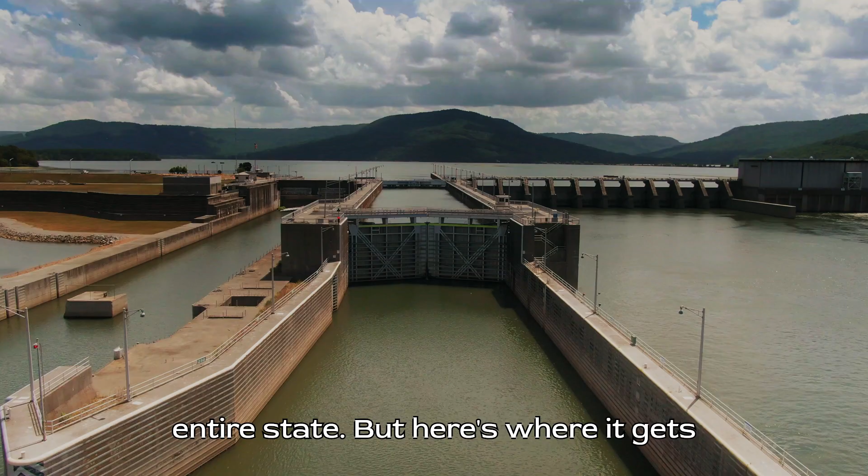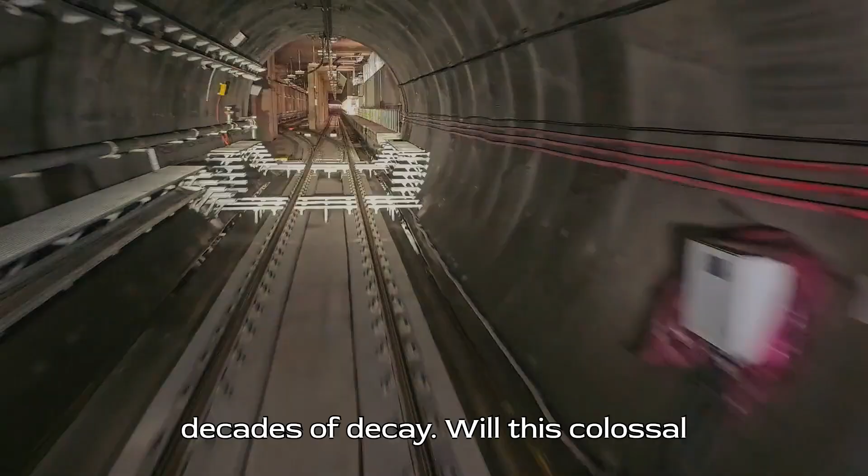But here's where it gets wild. A $20 billion plan is in motion, promising to rewrite California's fate. They're not just digging a tunnel, they're challenging nature itself, defying earthquakes, droughts, and decades of decay. Will this colossal gamble make California the blueprint for water resilience, or will it sink under the weight of its ambition? Stick around, because this story is as explosive as it gets.

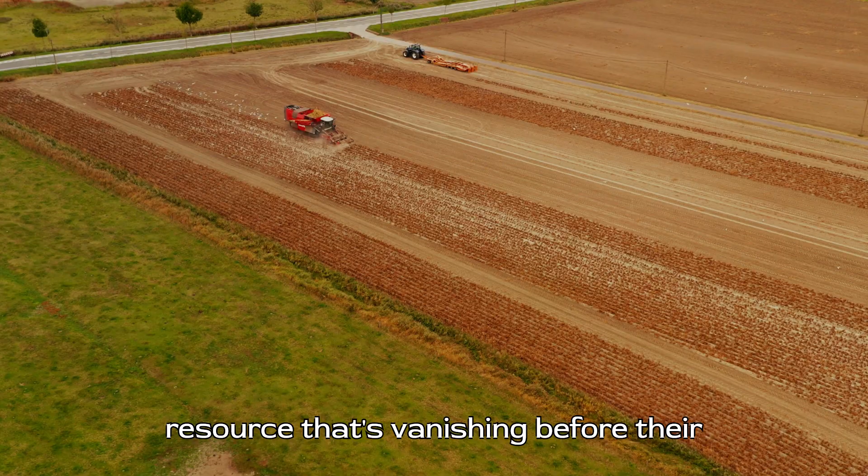California's water crisis isn't just a problem, it's a ticking time bomb. Picture this: millions of people, sprawling cities, and endless agricultural fields, all desperate for a resource that's vanishing before their eyes. Climate change is the relentless villain, turning up the heat and extending droughts like never before.

Enter the Delta Conveyance Project, a $20 billion gamble to save the state's future by re-engineering how water flows. Bold? Absolutely. Necessary? You bet your life on it.

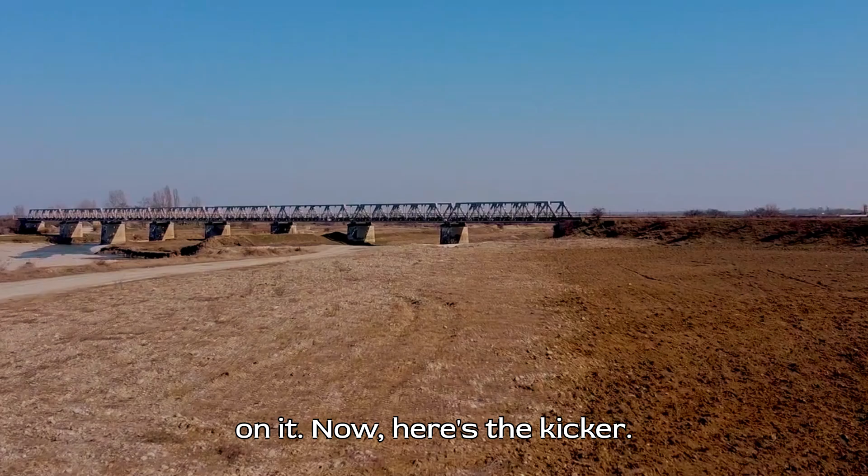Now, here's the kicker. California's water isn't where it's needed most. Northern California, rich in rivers and reservoirs, hoards 75% of the supply, while the South, home to thirsty cities like Los Angeles, struggles to keep up. Transporting water through the state's aqueduct system is already a Herculean effort, and it's cracking under the strain. Add seismic risk into the mix, and you've got a potential disaster waiting to strike. One earthquake could leave millions high and dry, literally.

Let's rewind a bit. Decades ago, California built an aqueduct system that was hailed as an engineering marvel. But here's the catch: it wasn't built for today's challenges. Exploding populations, relentless droughts, and seismic risks weren't part of the blueprint. The cracks in this aging system are no longer metaphorical. They're real, and they're growing.

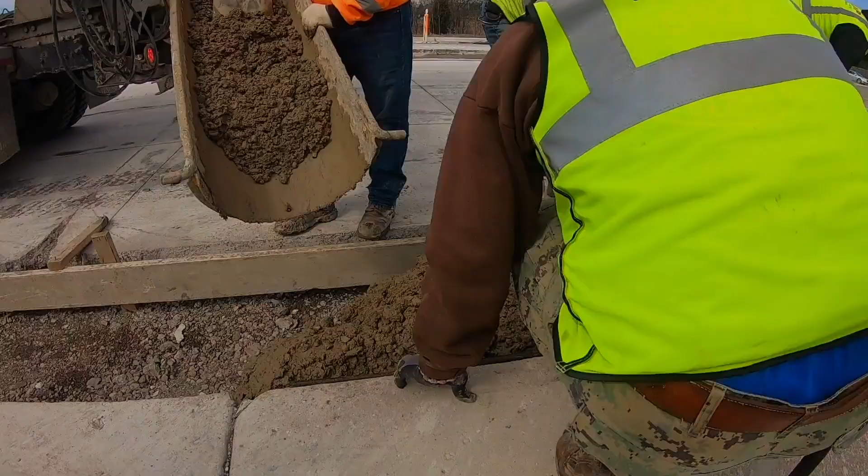The Delta Conveyance Project aims to plug these gaps with a revolutionary tunnel under the Delta, promising resilience against nature's wrath. But not everyone's cheering. Critics are sounding alarms about environmental concerns, from disrupted ecosystems to saltwater intrusion. Can California really balance urgent water needs with the delicate dance of preserving nature? The stakes are sky high, and the clock is ticking.

So what's next? To understand the scale of this challenge, we need to unravel the state's geographic imbalance, a problem that's as old as California itself.

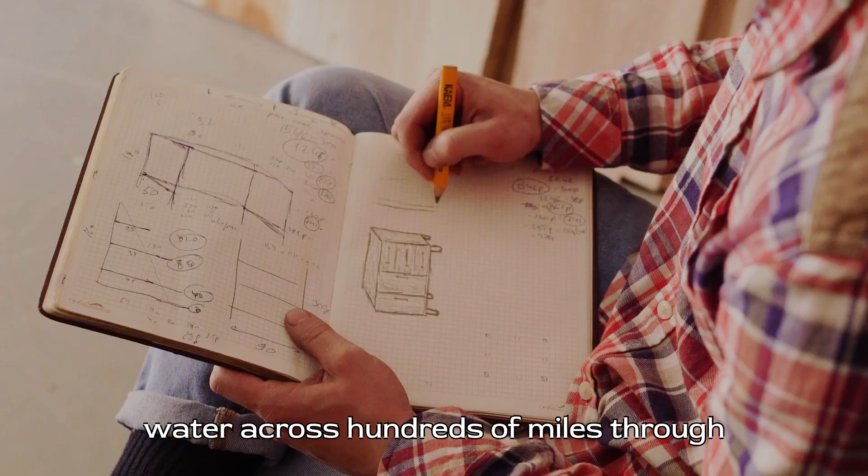Let's dive in. Imagine a state where water flows like a paradox, abundant in the north, yet desperately needed in the south. California faces this conundrum daily, with 75% of its water tucked away in northern reservoirs while the population and agriculture thrive in the south. It's a logistical dilemma on an epic scale, requiring Herculean efforts to transport water across hundreds of miles through aging aqueducts. Every drop feels like it's traveling on borrowed time.

This imbalance isn't just inconvenient, it's a disaster waiting to unfold. The aqueduct system, though impressive, wasn't built to handle today's challenges of population booms and climate change. One tremor, one prolonged drought, and the system could buckle, leaving millions stranded. It's a high-stakes balancing act, with Southern California precariously perched on the edge of a water crisis.

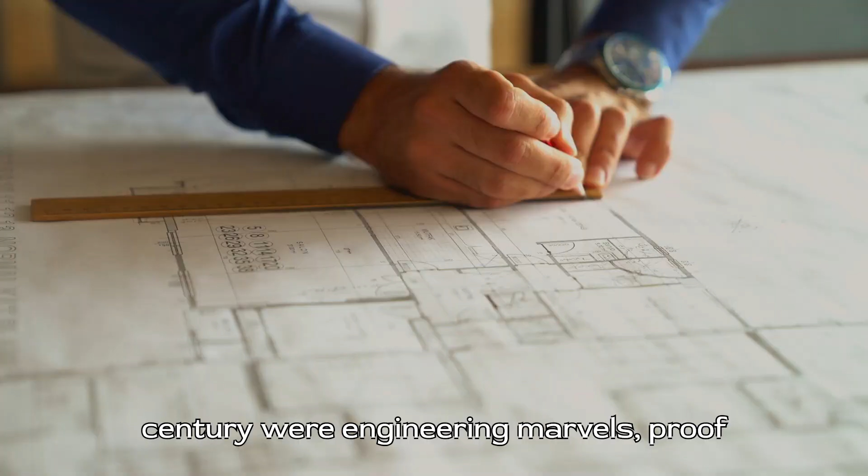But here's the twist. California has faced impossibilities before. The aqueduct systems of the 20th century were engineering marvels, proof of humanity's ability to conquer the impossible. Yet the Delta Conveyance Project promises something even more daring, a lifeline beneath the Delta, a solution to bridge this water divide and shield the state from seismic catastrophe. It's a gamble, but one California can't afford not to take.

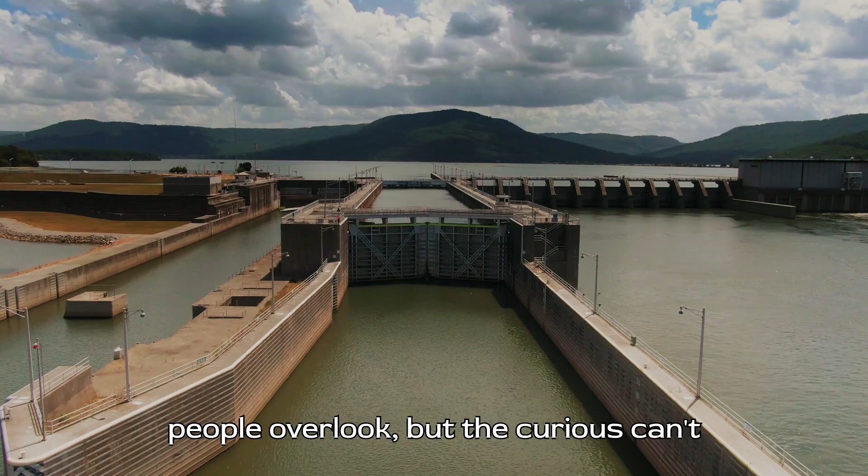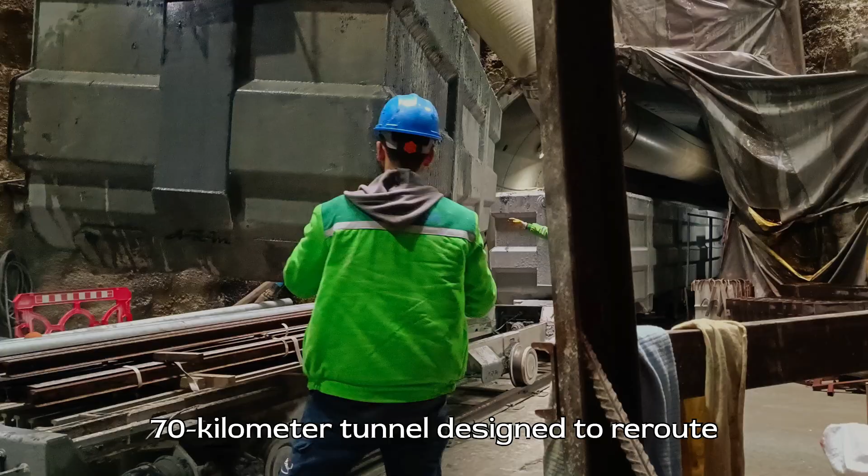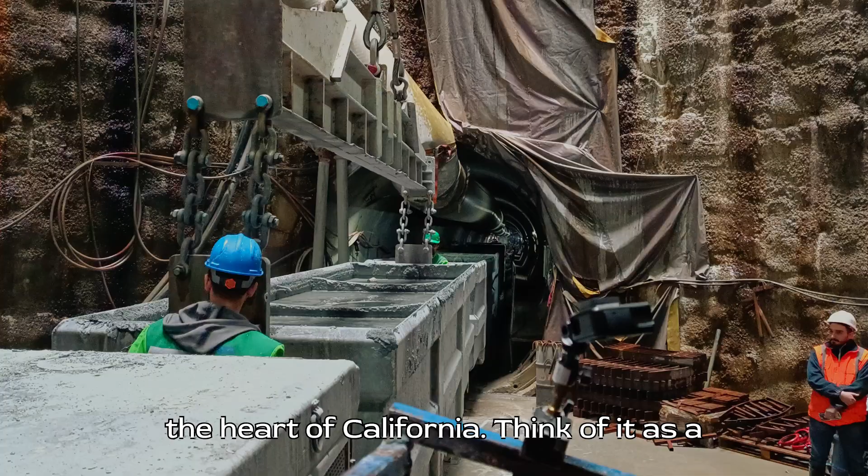California's audacious $20 billion Delta Conveyance Project is nothing short of groundbreaking. At its core is a 70-kilometer tunnel designed to reroute water under the Delta, safeguarding the state's supply from seismic risks and climate-induced disruptions. This project isn't just an upgrade, it's a complete reimagination of how water moves through the heart of California. Think of it as a lifeline threading through an intricate web of challenges. The tunnel promises to revolutionize water distribution, reducing reliance on outdated systems vulnerable to earthquakes and saltwater intrusion.

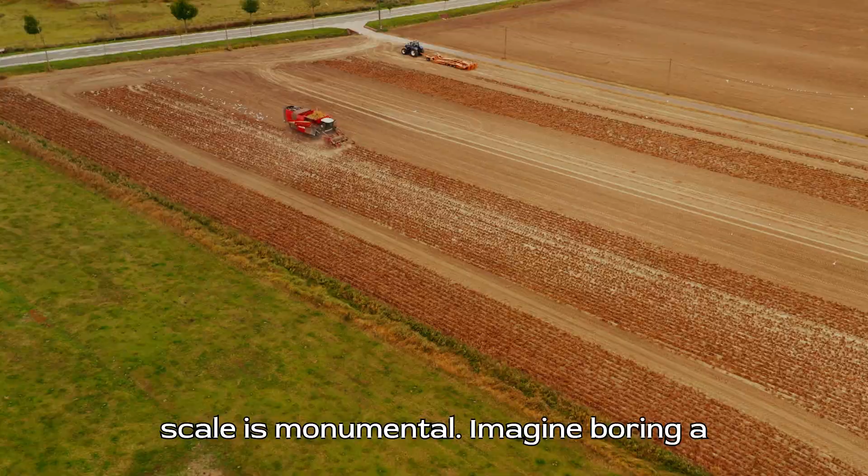It's engineered to endure extremes, ensuring a steady flow even when natural disasters strike. But the scale is monumental. Imagine boring a tunnel under one of the most ecologically sensitive areas in the world. It's a blend of cutting-edge technology and bold ambition.

Critics, however, argue that such a massive project comes with enormous risks. From potential ecological harm to the sheer cost, the Delta Conveyance Project has sparked heated debates. But for supporters, it's not just about mitigating disaster, it's about securing California's future. Without action, the state's current infrastructure could crumble under mounting pressures, leaving millions vulnerable.

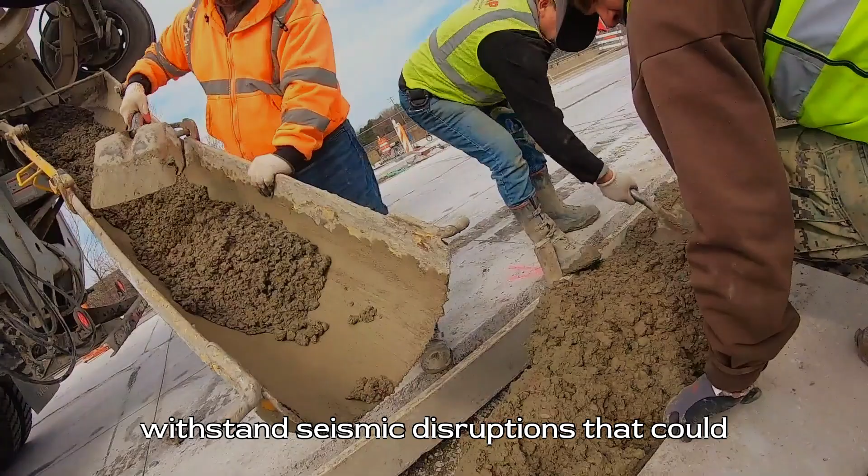The tunnel itself is a marvel, built to withstand seismic disruptions that could otherwise cripple the state's water supply.

Strategically placed maintenance shafts ensure long-term reliability, allowing for ongoing repairs without halting operations. The journey ends at the Bethany Reservoir, where a state-of-the-art pumping plant completes the transfer. Every element is purpose-built to secure California's water future.

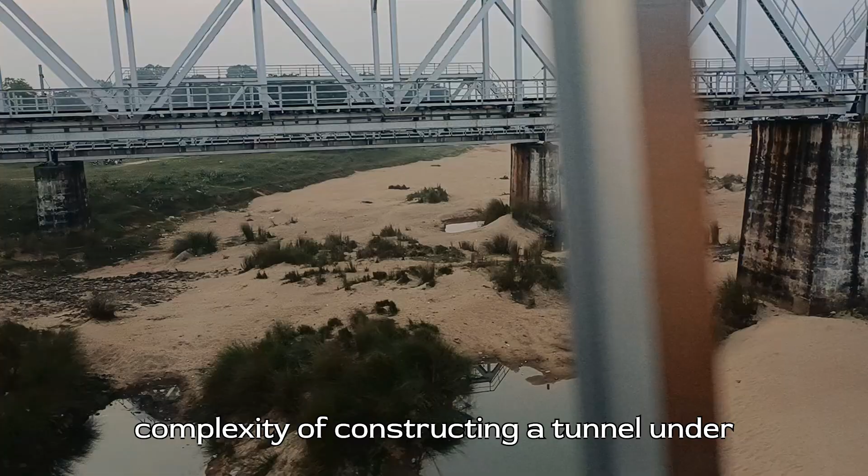Yet even the most robust systems have their challenges. The sheer complexity of constructing a tunnel under the fragile Delta ecosystem raises significant environmental concerns. Engineers face the daunting task of balancing progress with preservation, ensuring that this bold vision doesn't come at the cost of the Delta's biodiversity. It's a tightrope walk between innovation and responsibility. But the stakes are too high to ignore.

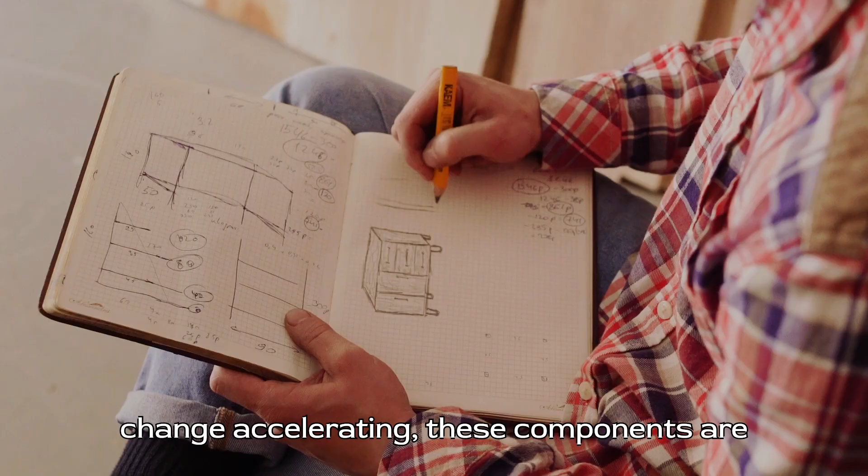With seismic risks looming and climate change accelerating, these components are designed to be more than solutions. They're safeguards for generations to come. And as we explore the obstacles ahead, it's clear that this project must navigate not just technical hurdles, but also the voices of skeptics and environmental advocates alike.

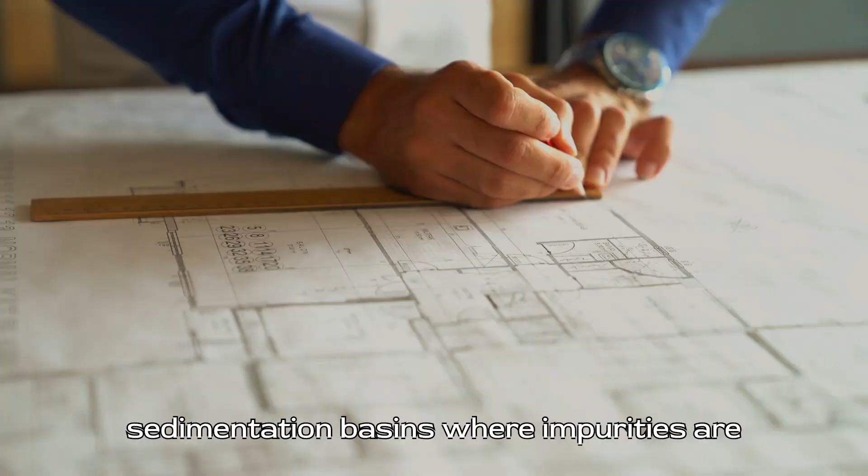The Delta Conveyance Project is more than just a tunnel. It's a meticulously engineered lifeline. At the heart of this $20 billion venture are two massive intakes along the Sacramento River, designed to collect water efficiently and sustainably. From there, water flows into sedimentation basins, where impurities are removed before embarking on its 70-kilometer journey.

Through the tunnel. This isn't just infrastructure. It's a masterpiece of modern engineering. The tunnel itself is a marvel, built to withstand seismic disruptions that could otherwise cripple the state's water supply.

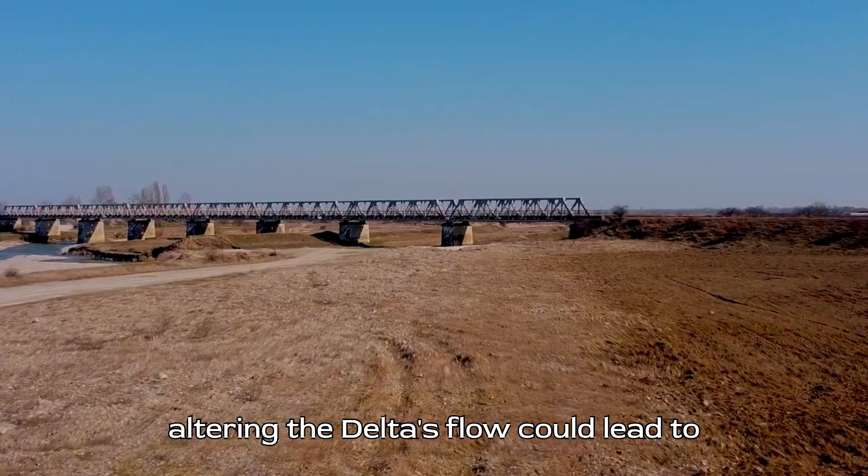The Delta Conveyance Project, while ambitious, is no stranger to controversy. Environmental advocates argue that altering the Delta's flow could lead to saltwater intrusion, disrupting fragile ecosystems and threatening species that depend on its delicate balance. The potential displacement of wildlife has sparked intense debates, making it clear that this project's ripple effects extend far beyond water distribution.

Financial concerns also loom large. A $20 billion price tag isn't just a number. It's a point of contention for taxpayers and local communities. Critics question whether the benefits truly outweigh the costs, especially when weighed against the risks of ecological harm. For many, it's a battle of priorities, securing water for human consumption versus preserving natural habitats.

Seismic risks further complicate the equation. While the project is designed to withstand earthquakes, skeptics wonder if this safeguard is foolproof. The stakes are enormous, with millions depending on this infrastructure to deliver water reliably. Balancing these concerns requires an intricate dance of engineering precision and environmental stewardship.

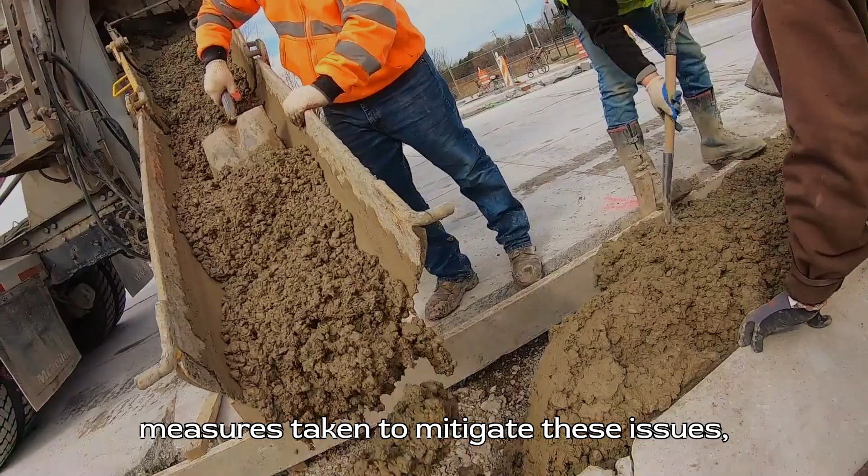As we delve into the measures taken to mitigate these issues, it's clear that this isn't just about solving a water crisis. It's about redefining how large-scale projects coexist with nature. What steps are being taken to ensure that this bold endeavor doesn't compromise the Delta's future? Let's explore the solutions next.

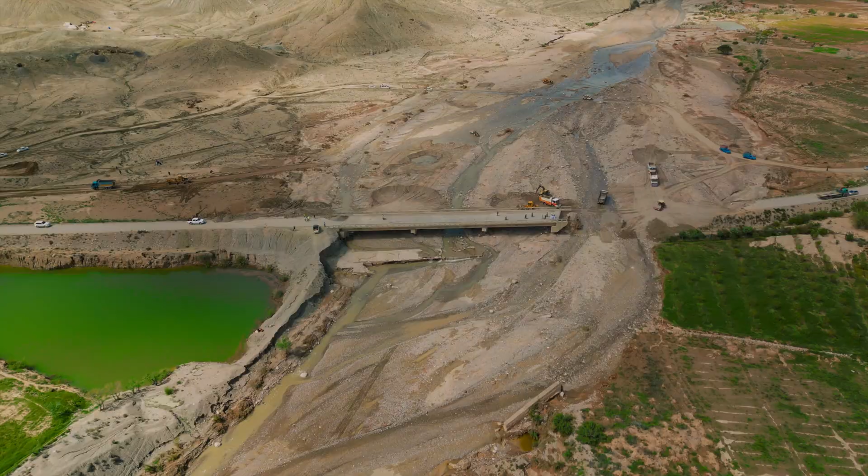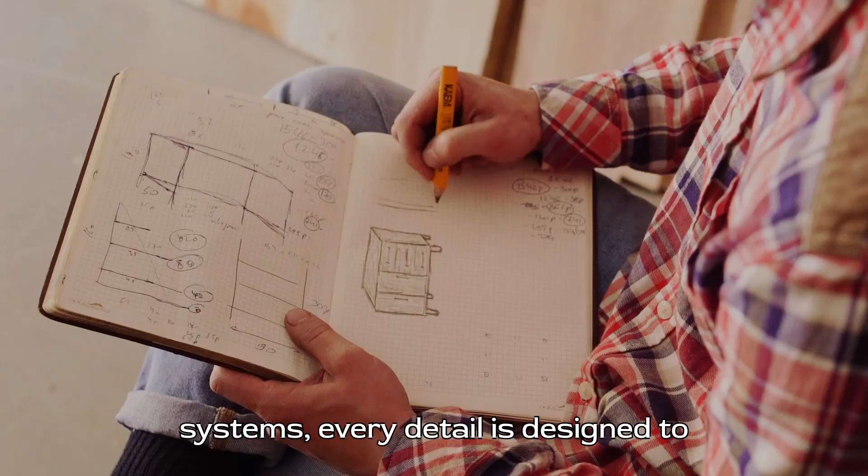Addressing environmental concerns is at the core of the Delta Conveyance Project strategy. Developers have conducted extensive reviews to understand the Delta's complex ecosystem and minimize disruption. From advanced fish screens at intake points to sediment management systems, every detail is designed to reduce the project's ecological footprint. This isn't just a tunnel. It's a commitment to coexist with nature.

One of the most significant steps involves safeguarding water quality. Engineers have incorporated cutting-edge technology to prevent saltwater intrusion, ensuring the Delta remains a vital habitat for both wildlife and agriculture. Meanwhile, mitigation plans include habitat restoration efforts, aimed at compensating for any unavoidable impacts. It's a meticulous balancing act that demands precision and accountability.

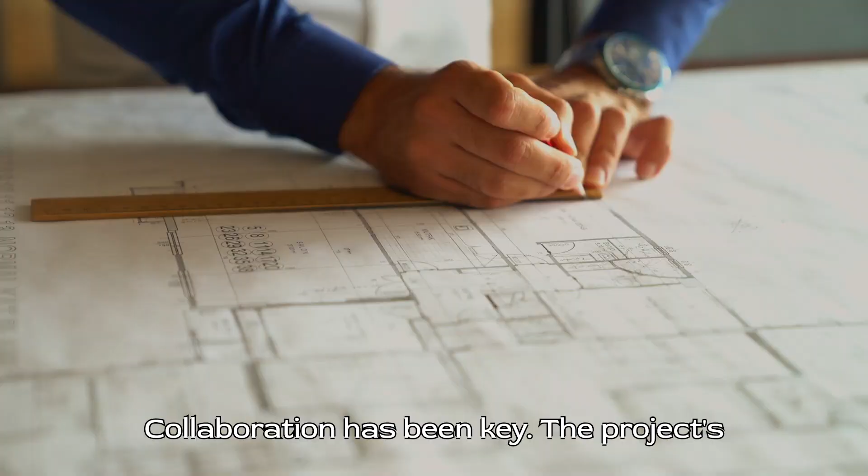Collaboration has been key. The project's developers have worked alongside environmentalists, scientists, and local communities to address concerns and refine designs. By integrating feedback, they've created a blueprint that strives to benefit both human and natural systems. However, skeptics remain, questioning whether these measures go far enough to protect the Delta's fragile balance. As the project moves forward, its success will depend on the ongoing dialogue between innovation and preservation.

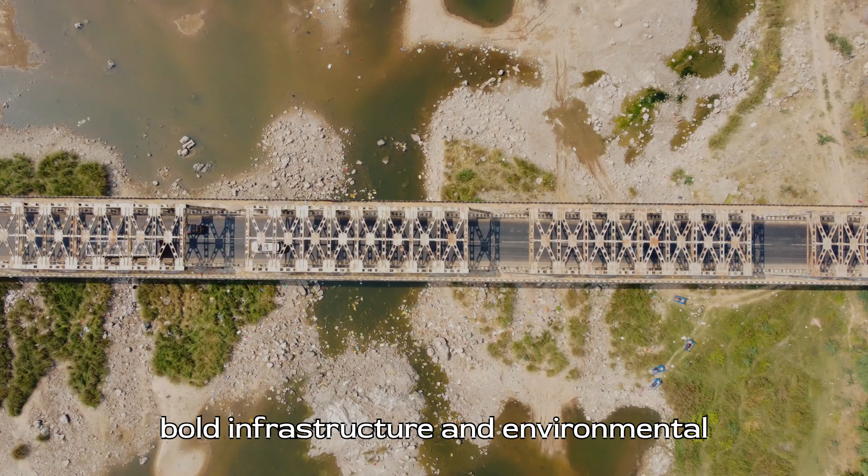Can California prove that bold infrastructure and environmental stewardship can coexist? The answer lies in the details and the lessons this endeavor will teach us all.

Imagine knowing something that most people will never grasp: the intricate dance between nature's power and human ingenuity. California's $20 billion plan isn't just about water. It's a blueprint for survival, a testament to what's possible when innovation collides with urgency. But here's the big question. How much of this knowledge can change your perspective, your actions, and maybe even your future?